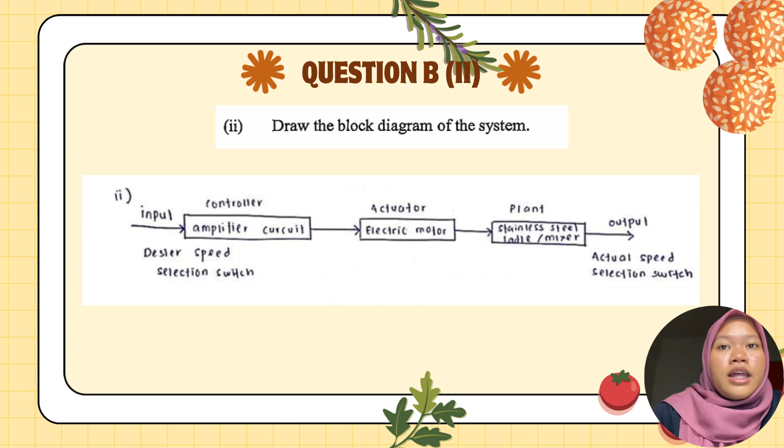The common mistake here is forgetting to label the arrows or getting the order of the blocks mixed up. Remember, this is an open loop system, so notice that there is no feedback line returning from the output back to the input. Once the switch is set, the system runs forward without checking if the speed is correct. Drawing it clearly like this ensures you get the full marks for the diagram.

Now for question B part 3, we need to identify and justify the type of system Farah is using. Based on the components and the block diagram we just drew, we can conclude that this is an open loop system. The justification is simple: the system has no feedback mechanism to monitor or adjust the motor speed automatically. This means the output, which is the speed of the ladle, depends entirely on the initial input speed setting provided by Farah.

In an exam, remember that the defining characteristic of an open loop system is the absence of a feedback loop. Even if the Dodol mixture gets thicker or the motor encounters resistance, the system will not know to increase power because it is not monitoring the output.

For question B4, the most significant drawback is that the system is highly sensitive to disturbances. In our case, as the Dodol batter thickens, the load on the motor increases. Since there is no feedback to tell the motor to work harder, the stirring speed will naturally drop, leading to inconsistent mixing. Secondly, the system has poor accuracy because it cannot self-correct. It simply follows the input switch setting regardless of the actual outcome.

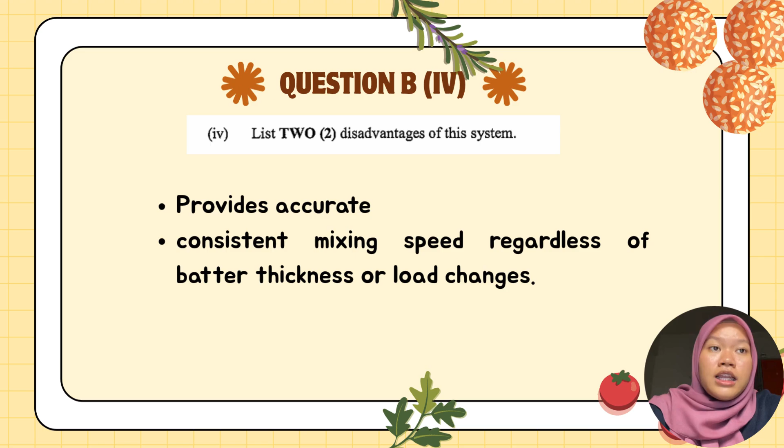Note for my fellow students, be careful with your slides. The current slide incorrectly lists an advantage of a closed loop system. For an open loop system, remember that it cannot maintain a consistent speed when batter thickness or load changes.

Last question is question C. Here the question is, the electrical Dodol mixer requires consistent speed to produce a rich consistency. Therefore, Farah decided to install a sensor to detect the speed of the stainless steel ladle rotation. Now let's solve this final part step by step.

For question 1, the sensor will be a tachometer for rotational speed. As for question 2, we will create the new block diagram. We begin with the input switch leading to the summing point. Then the signal passes through the amplifier, followed by the motor, and eventually the ladle.

Nevertheless, this time, we will include the feedback path coming from the output. We draw this line returning from the output, labeled as tachometer and connected to the summing point with a negative sign. As for question 3, this becomes a closed loop system. Our reasoning is based on the utilization of a feedback sensor to observe and examine the resulting output speed. The latter compares it to the expected input, diminishing possible error accordingly.

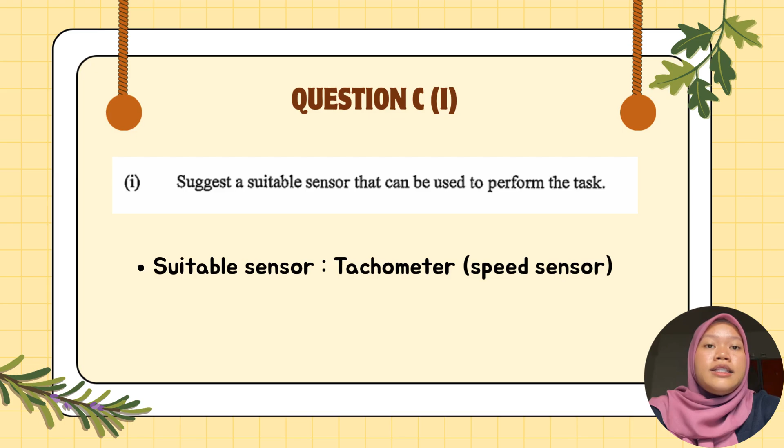So, for the solution to question C(i), the best sensor for this job is a tachometer, which measures angular speed. So, why a tachometer? Well, Farah needs a consistent speed to get that perfect Dodol consistency. A tachometer is the best fit because it directly measures angular speed and converts it into an electrical signal. This signal is what tells our brain, the amplifier, exactly how fast the ladle is turning, so it can adjust the motor power if the batter gets too thick.

The solution to question C(ii). We must draw the diagram. We begin on the left with our input, the desired speed selection switch. The signal now enters a summing point, which is a circle with a plus minus sign. It is here that the magic occurs. It checks what we want against what we have.

The signal moves forward to our controller, the amplifier circuit, and on to the actuator, which is the electrical motor. The motor drives the plant, our stainless steel ladle, to produce the output, the actual rotation speed. Now, to maintain this speed during the Dodol thickening, we add the sensor, a tachometer. We draw a feedback line from the output through a block labeled tachometer and connect it back to the negative sign of the summing point.

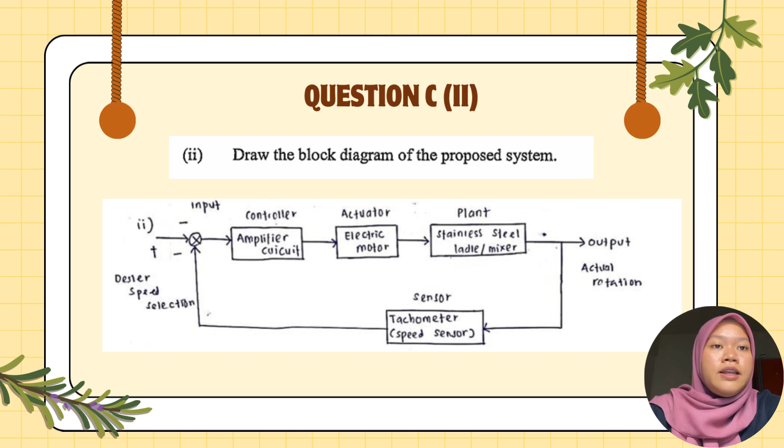Why use a tachometer? Because it is specifically designed to measure angular speed. It converts the rotation of the ladle into an electrical signal that the amplifier can understand. This allows the system to detect if the Dodol is slowing down the motor and immediately adjust the power to maintain that perfect consistency. This complete diagram clearly shows a closed loop system.

For solution C(iii), let's identify the type of system Farah has designed. Based on our design, we can clearly see that this is a closed loop system. The justification is that the system now incorporates a feedback mechanism. By adding the tachometer, the output, the actual rotation speed of the ladle, is continuously monitored and fed back to the controller. This allows the amplifier to compare the actual speed against the desired input and automatically adjust the motor power to correct any error.

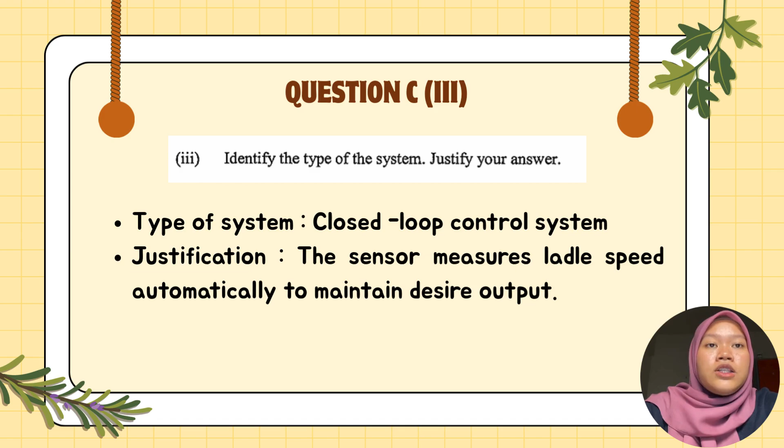In an exam, always remember, if the system can sense its output and make changes to fix a mistake, it is a closed loop system. This solid justification is key to securing your full 3 marks for this part.

Finally, let's look at solution question C(iv), the major advantage of this new setup. The most important benefit is that its closed loop system provides an accurate and consistent mixing speed regardless of batter thickness or load changes. This is because the tachometer is constantly watching the ladle. It can detect if the thick Dodol is causing the motor to struggle. It immediately sends this feedback to the amplifier to boost the power.

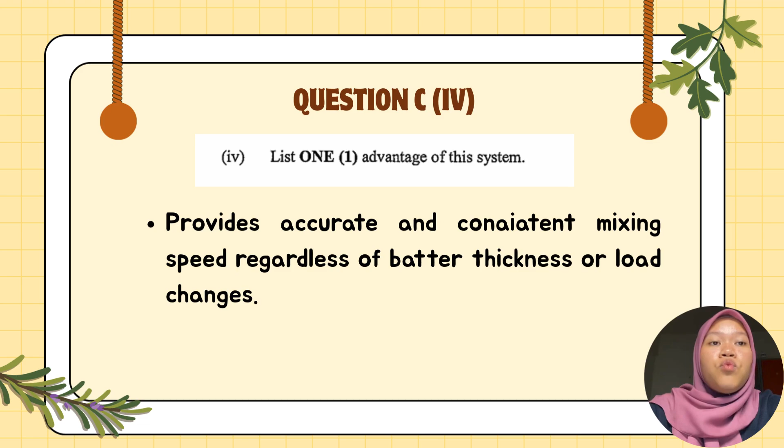Unlike the open loop system, which would just slow down and result in uneven mixing, this system ensures that Farah gets the exact rich consistency she needs for a high quality product every single time. This effectively solves the problem we identified earlier and is worth a solid 2 marks in your exam.

Before we conclude, let's test our understanding with a quick challenge. Which component is essential to transform an open loop system into a closed loop system? Is it A, motor, B, amplifier, or C, sensor? If your answer is C, sensor, you are exactly right. In our case study, adding the tachometer allows Farah's system to monitor the actual speed and correct errors automatically.

To recap, we identified the components of the electrical mixer, modeled its open loop behavior, and finally upgraded it with a feedback loop to maintain consistent speed despite disturbances. If you are able to follow these steps and answer the questions, you now have a strong understanding of this core topic in control principles.